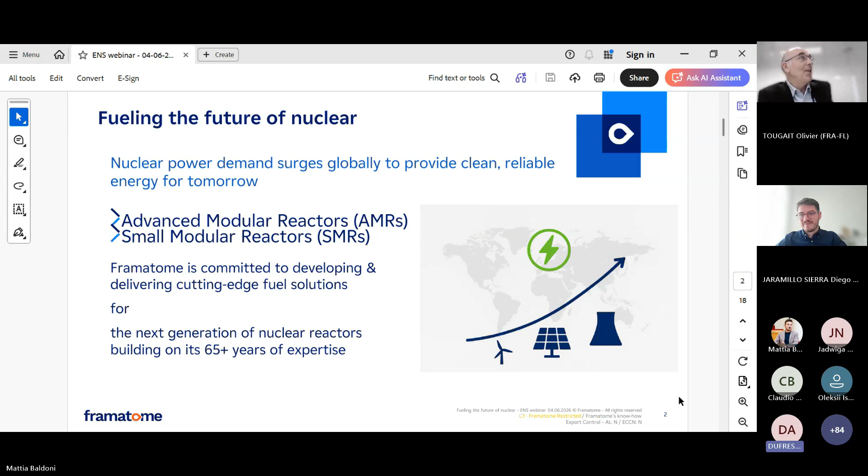Hello, everyone. So I'm going to start. In response to the growing needs related to fuel for low and medium power reactors, Framatome is structured through its innovative reactor fuel hub to address the challenges of fuel availability for modular reactors.

For that, Framatome has selected four technologies. For advanced modular reactors, which are considered Generation IV systems, Framatome has selected the high temperature gas-cooled reactors, which use TRISO fuel, and also fast breeder reactors, which use either metallic fuel or ceramic fuel, such as MOX fuels. MOX fuel is a mixture of uranium oxide and plutonium oxide.

The second type of modular reactors are more likely based on third generation systems. They are light water small modular reactors, and for that, Framatome is developing fuel solutions for both pressurized water reactors and boiling water reactors. The fuel for light water small modular reactors will be presented in more detail in the second part of this presentation by my colleague, Alice.

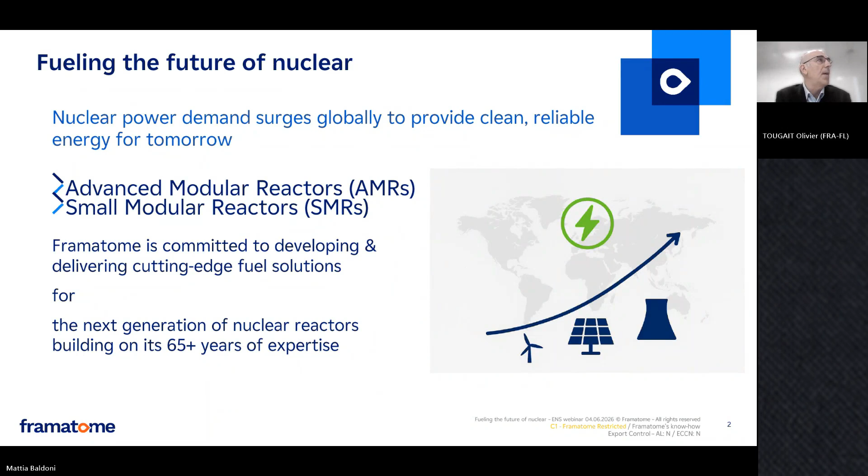With over 65 years of experience, Framatome can develop cutting-edge fuel solutions for the needs of our customers and partners, also including startups. Next slide, please.

Let's start with prototyping capabilities for light water SMR designs, which are primarily located in Karlstein in Germany, where full-scale fuel assemblies can be manufactured and tested.

Now, if we move to fuel for advanced modular reactors, let's start on the west coast of the United States in Richland, where Framatome has its center of excellence for advanced fuel. The Richland site provides various fuel types and services, including deconversion of LEU+, and in the near future deconversion of HALEU, all in order to convert UO2 powder to uranium metal and TRISO fuel.

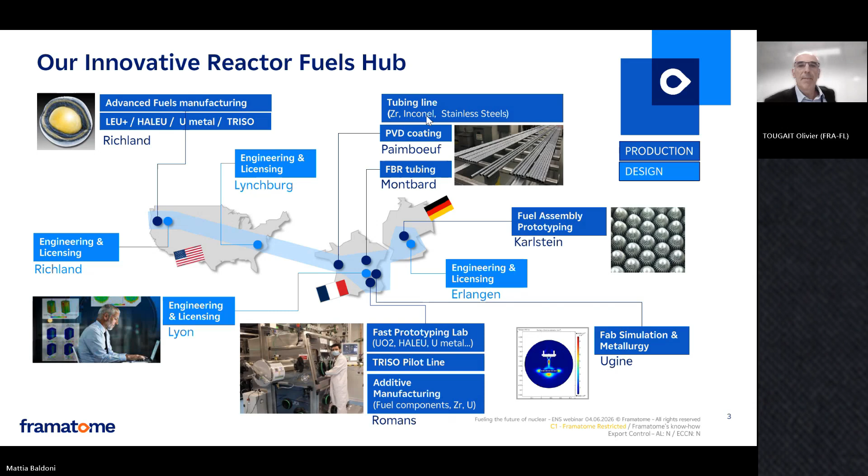Regarding fuel solutions for fast breeder reactors, Framatome has long experience in fuel component fabrication, based on our involvement in past French programs such as Phénix and Superphénix. As an example, Framatome has delivered more than 300,000 fuel pins, as well as more than 1,300 hexagonal tubes for these two French programs. In addition, it should be mentioned that Framatome is also the current MOX designer for the PWR fleet.

And in the United States, Framatome is working on the metallization process of HALEU fuel in cooperation with TerraPower through the development of a pilot line at our nuclear site in Richland, in the northwest of the United States. This metallization pilot line, which has been operational since 2025, works on the qualification of the conversion of uranium oxide into metallic HALEU.

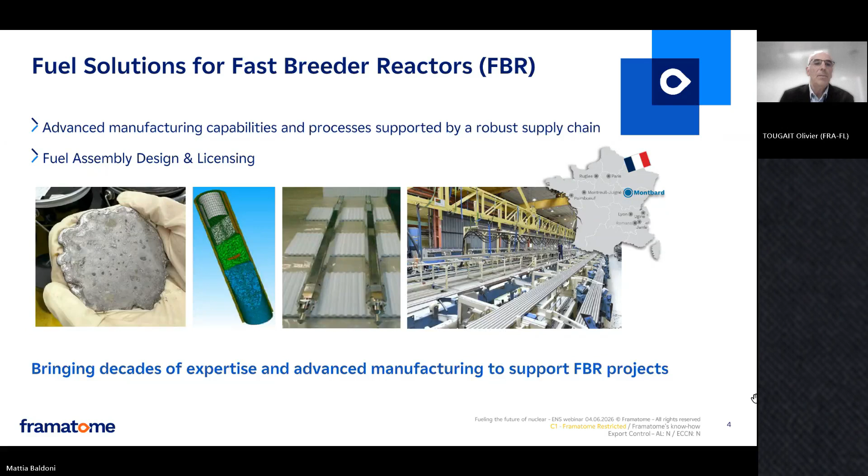So regarding now the fuel for HTGR and MMR projects, given the shift in project timelines between the United States and Europe, Framatome selected two approaches to ensure full coverage of HTGR projects regarding TRISO availability and innovation. In the United States, Framatome Richland combined the deconversion program for high-assay low-enriched uranium, as well as uranium production, with TRISO fuel manufacturing.

For this last stage, Framatome has established a joint venture with Standard Nuclear, formerly known as USNC, to produce TRISO fuel at industrial scale. And I will give more detail about the objective and the mission of the joint venture in the coming slide.

In parallel, in Europe, Framatome is establishing a new sovereign capability in France, in Romans, for European HTGR reactor projects by installing a TRISO pilot line in Romans. The objective of this TRISO pilot line is mainly qualification and licensing, but also TRISO innovation, as well as improving the manufacturing process. And I will give more detail about the TRISO pilot line very soon. So please, can you change the slide?

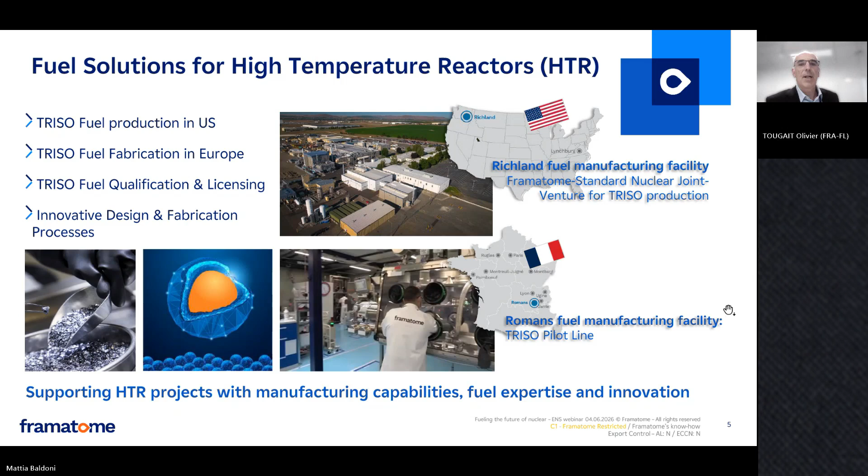So regarding Framatome's strategy in North America, as I said, it is mainly for production of TRISO fuel. And for that, we signed a joint venture with Standard Nuclear in September 2025. It is a full cooperation comprising functional technology and a production line provided by Standard Nuclear, fully adapted to an industrial nuclear environment by Framatome, providing the infrastructure, staffing, and licensing.

The joint venture will typically produce UCO TRISO particles within SiC compacts, but on demand, production can be adapted to UO2 TRISO particles, also in a graphite matrix, in order to have different fuel element geometries, such as compacts or pebbles. Production will start very soon, in 2027, and capacity will increase depending on market demand. Next slide, please.

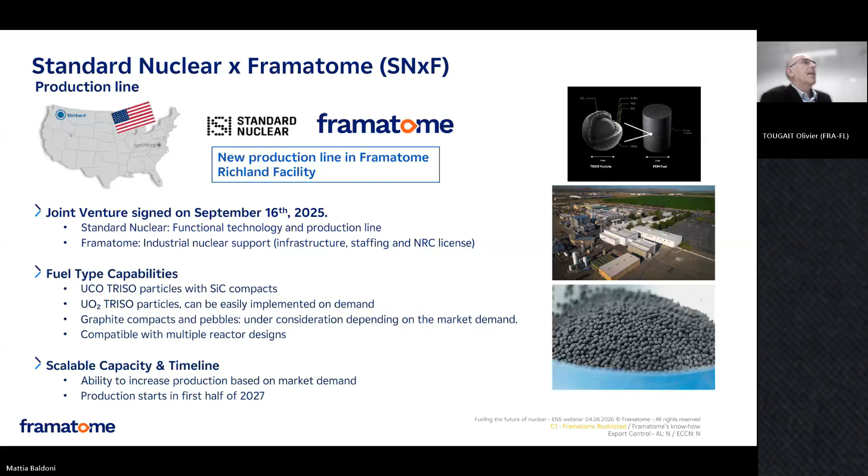Regarding now Framatome's strategy in Europe, Framatome is installing a TRISO pilot line in Romans, in France, very close to our first fast prototyping lab, the CRIL facility that maybe some of you already know. The TRISO pilot line comprises here the fabrication of the kernel, in green.

All the heat treatment for conversion, sintering, and coating, as well as here in pink, the capability for compacting, as well as the quality control, along with all the utilities and facilities needed for storage and other shipping and conditioning of samples. The project was started early 2025, and it is planned to be operational at the end of 2027.

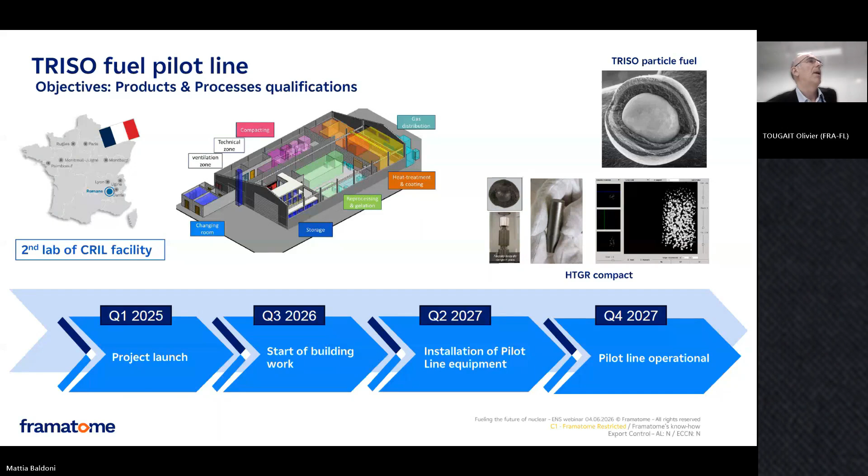Next slide, please. So the objective of the pilot line, as I said, is optimization and qualification of the manufacturing process for typically UO2 and UCO type of TRISO particles. In case of qualification requiring irradiation tests, Framatome will be able to handle and manufacture samples with enrichment up to 20%.

The second objective of the TRISO pilot line is also to develop innovation, with a focus on the optimization of the manufacturing process in order to reduce the manufacturing cost of the TRISO particles, which is a challenge.

So in short, please note that the pilot line is fully open to partners from Europe, Japan, and the United States for joint programs. It will have the capability to manufacture both UCO and UO2 type of particles within a graphite matrix. And prototype samples can be obtained for further qualification under irradiation if needed.

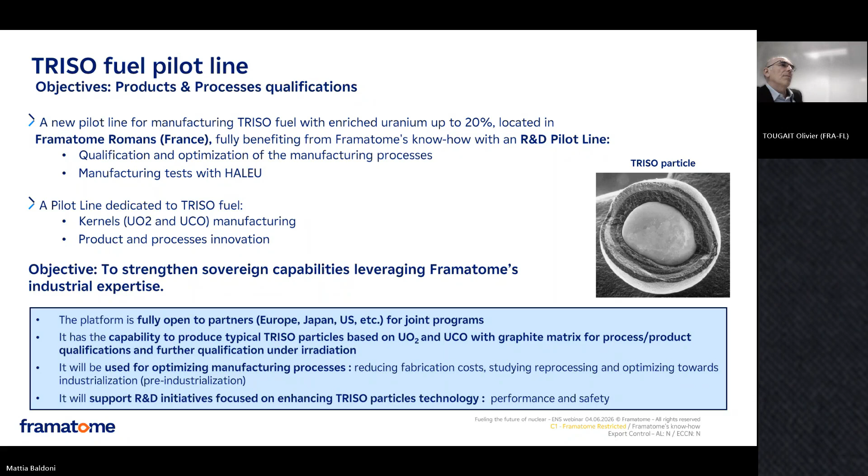And regarding innovation, we will work on optimizing the manufacturing process for reducing the fabrication cost, but also we will work on the reprocessing of the liquid effluent, which is a key point in the management of the production of TRISO fuel. Next slide, please.

Along with the prototyping facility, Framatome is also developing methods for fuel safety justification based on codes and methods. And for that, we are already relying on a thermomechanical and diffusion code developed in cooperation with CEA, the Atlas code, which is able to model the fuel behavior at the particle scale.

Now, Framatome is developing its own industrial codes at a larger scale, at the fuel element scale, in order to be able to interface with the core physics by including this new computational code into our fully integrated neutronics and thermohydraulics packages for fuel modelization.

And here, I'm stopping the presentation of the development of the fuel for AMRs, and I give the floor to my colleagues. Alice, thank you for your attention.

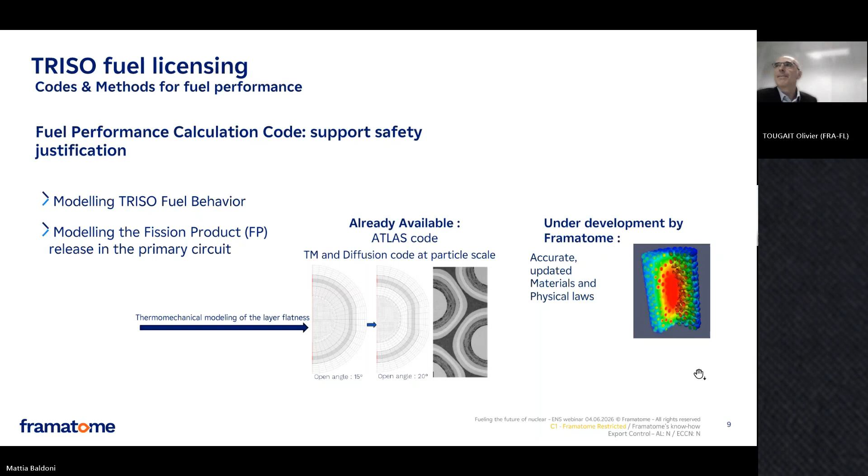Okay, so now I will go to, let's say, more known fuel products proposed by Framatome for what we call light water small modular reactors, or SMRs for short. We know these SMRs require tailored fuel solutions because there is a diversity of designs in the new concepts under development, and they also need fast solutions to

support their deployment timelines. So at Framatome, we leverage the decades of expertise and experience we have and build on our qualified fuel products for PWR and BWR to accelerate fuel development for SMRs, thanks to the use of proven technologies relying on a well-established and ready supply chain.

This portfolio of solutions relies on existing standard technobricks that are combined in a modular way to maximize the performance of the SMR from a fuel standpoint, both economic and technical. And for this, we are engaged in developing value-adding features and also making sure that this offer matches the needs of SMR developers.

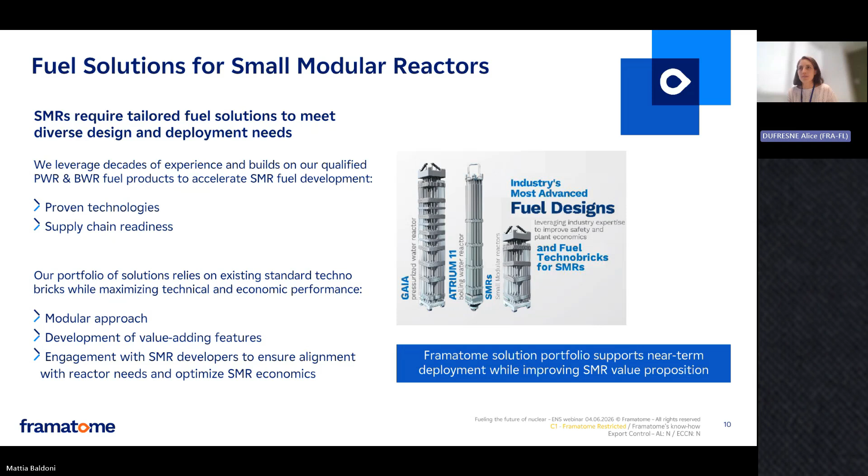Okay, next slide, please. Okay, I think the video doesn't work. So yeah, we'll put the link for the video after the webinar.

So how do we adapt the existing fuel products to SMR designs? We have our portfolio of existing proven fuel products, best in class, that enable fast track design adaptation, manufacturing, licensing, and deployment to markets. For non-boiling light water SMRs, the GAIA fuel product is the starting point. This is possible thanks to the use by SMR developers of the standard 17 by 17 array for this type of reactor.

For boiling SMRs, ATRIUM 11 fuel, which has very good operational experience feedback with zero leakers so far after 10 years in the US, is the starting point for this type of reactor. We know that in the SMR designs under development, there are some deviations from the standard in terms of core cavity height.

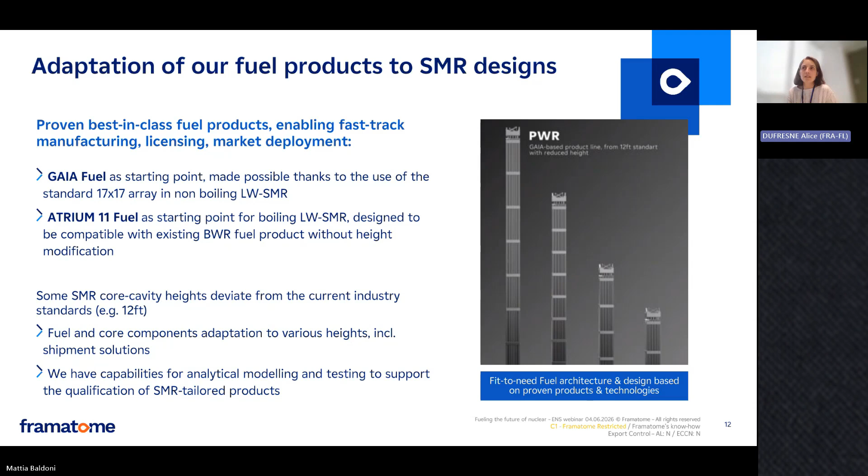So there is a proposed adaptation of the fuel and core components to the various heights, including their shipment solution. Framatome has capabilities for analytical modeling and also full-scale or component-scale testing to support the qualification of the SMR tailored product. So we really have the ability to propose a fit-to-need architecture and a design that is based on proven products and technologies.

How we can improve the economics and the fuel cycle of SMRs: we rely on our expertise as a fuel designer to propose high-resolution neutronic design to optimize the fuel utilization and improve the reactor economics. This is possible thanks to playing on the enrichment and the burnable absorber zoning.

In addition to that, we can leverage the Advanced Fuel Management Program that is on the way to deliver LEU plus fuel with enrichment higher than 5%. It's actually happening in our fuel fabrication facility in Richland in the US on the West Coast, that was presented by Olivier on the map. This program includes the fuel design, licensing, fuel fabrication, and shipment. Going above the 5% limit allows, of course, the installed base to go to longer cycles, 24-month cycles, but for SMR it's also an additional lever to improve the fuel cycle economics thanks to this added flexibility.

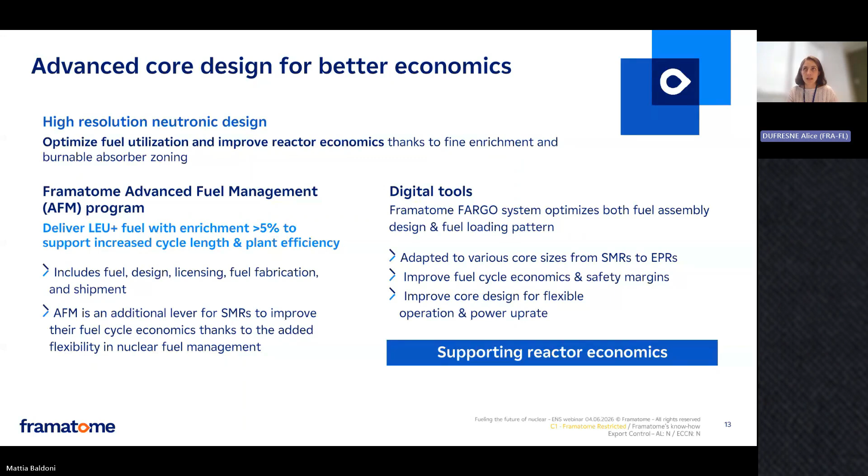It is a tool that allows improving the core design for flexible operation with increased requirements in terms of load following and power uprate. So all these tools are available and applicable to SMR development to support SMR economics from a fuel cycle standpoint.

Framatome has also developed an enhanced accident tolerant fuel program called Protect, and it is compatible with SMR. The Protect program is the leading EATF solution supporting reactor safety and economics. The first irradiation of this chrome-coated fuel rod started in 2016 in Gösgen in Switzerland. We had the first irradiation of a fully coated fuel assembly start in 2021, and the industrial deployment of the capability is on the way to have first reload capacity next year.

This EATF program has been demonstrated for performance up to a burn-up of 73 gigawatt-days per ton, and it has demonstrated compatibility with pH control systems based on KOH or LiOH. So it's compatible with SMRs.

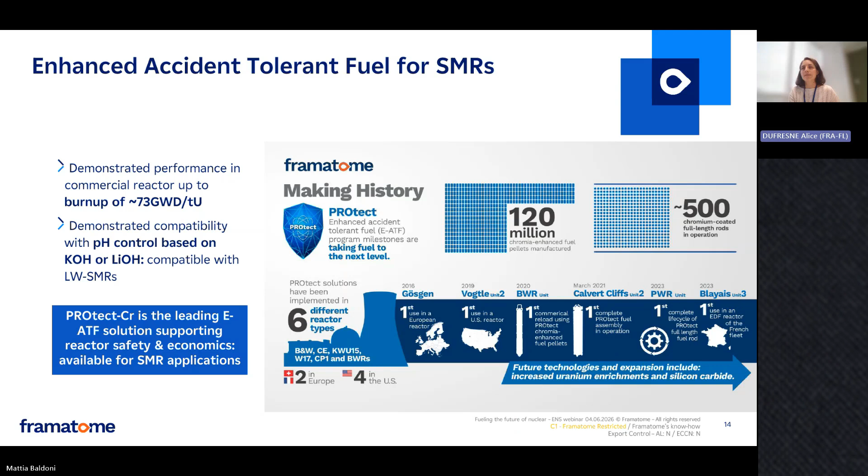We know also that with the variety of SMR designs, there are new specific conditions proposed or embarked in some of these concepts. We have, for example, the case of natural circulation, for which the core contribution to the primary loop pressure loss is typically 40%. So anything that can be improved in terms of pressure loss on the fuel assembly is an improvement in terms of heat exchange efficiency, and so overall plant efficiency and safety.

So what is ongoing is to optimize the nozzles, top and bottom, to really reduce their pressure loss. Just to give an order of magnitude of natural circulation conditions: typically in a fuel assembly, the mass flow rate is divided by 20 in comparison with a typical PWR. So there is simplification that can be done on the fuel assembly to optimize it with respect to pressure loss.

There is an illustration here on how much we can adjust the top nozzle to reduce the spring force on the fuel assembly. But clearly, what I want to convey here is that with variation in the core design, there is modularity that can improve the value of the fuel assembly to really meet specific needs and unlock new possibilities in terms of performance.

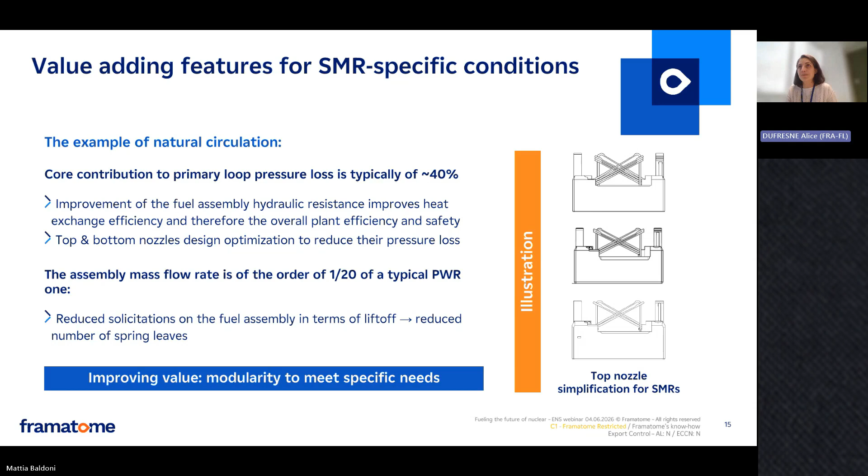Okay, and to close this presentation, I also want to highlight how much the fact that we start from a standard proven techno-brick approach can accelerate the development of fuel. This use of existing components and adaptation of existing components allows us to really rely on the global supply chain and manufacturing facilities that are already qualified and established for the current fuel assemblies and fuel products for the installed base.

So the proposed approach is to rely on standard materials and components, with an approach that targets compatibility and value-adding features, using as much as possible the proven manufacturing technologies and processes, and of course relying on the robust qualification process that already supports our fuel delivery on a daily basis.

In addition, the in-house analytical modeling, simulation, and testing capabilities ensure compliance of the proposed product with the regulatory and performance requirements. And last, there is also an available fuel services portfolio for SMRs. So the strategy is really to rely on proven technologies and infrastructure to allow fast market implementation, from the design to the licensing to the manufacturing and shipment.

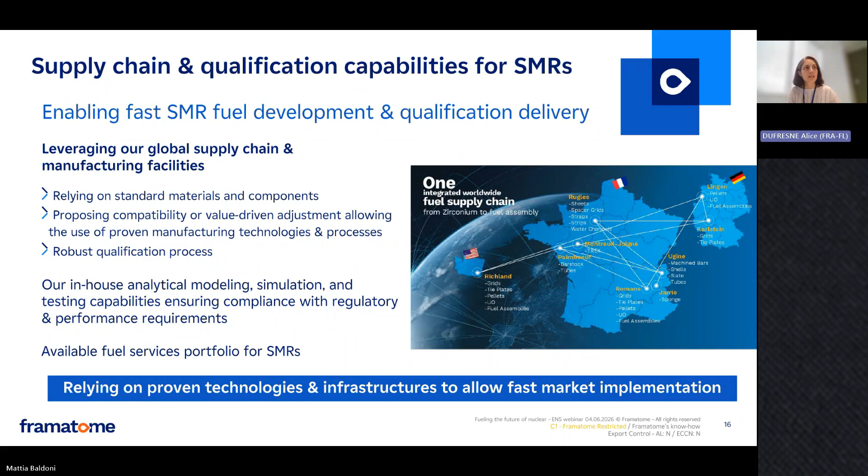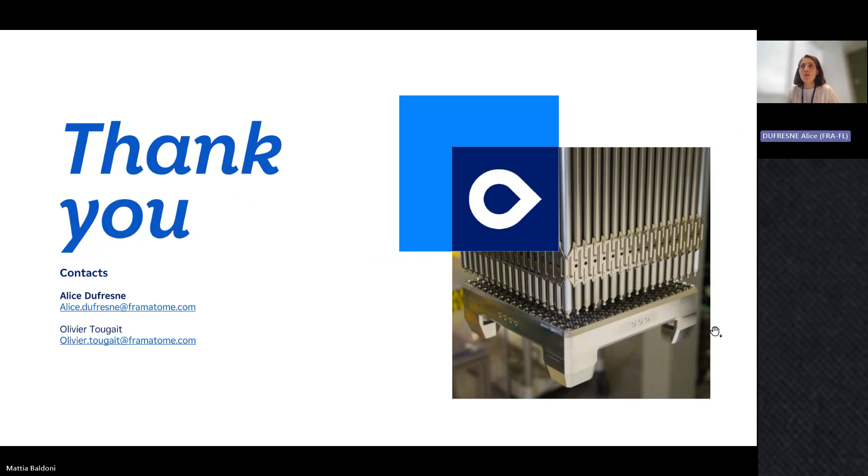Okay, this is the concluding slide. So from the concept to manufacturing, Framatome is ready to support the fuel journey of SMRs and AMRs. Thank you for your time, and we're happy to take questions in the chat.